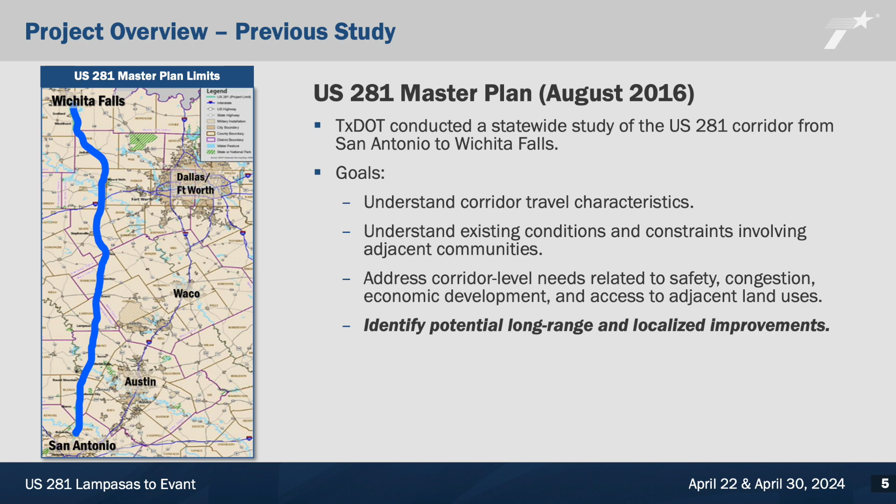For Lampasas County, the 2016 Master Plan findings included the following: improvements are needed in the next 5 to 10 years to address safety and mobility needs. Lowering the crash rate was needed on US 281, specifically from Lampasas to north of Adamsville. Additional capacity was needed to meet future traffic demands resulting from population growth and significant truck traffic.

The purpose of the proposed project is to enhance safety and improve mobility while addressing long-term needs of the corridor and the demands of a growing population. There is a need to address an aging transportation infrastructure in a state with a rapidly growing population. Originally constructed in the 1930s, improvements on US 281 are needed to continue supporting the growing population in the area and to improve passenger and freight mobility.

In addition, the project is needed to manage statewide transportation priorities. To meet the requirements of the Texas trunk system, US 281 is to be improved to enhance mobility, safety, and connectivity between cities with a population of over 20,000 people and major ports and ports of entry.

We have continued to research crash information since the last open house. US 281 from Lampasas to Evant had a rate of about 107 total crashes per 100 million vehicle miles from 2013 to 2022, which is about 1.5 times higher than the 2022 statewide average of 68 total crashes per 100 million vehicle miles for rural U.S. highways. Statewide data indicates crashes on undivided highways are 1.6 times more frequent and 1.5 times more likely to be fatal compared to divided highways with grassy medians as proposed in this project.

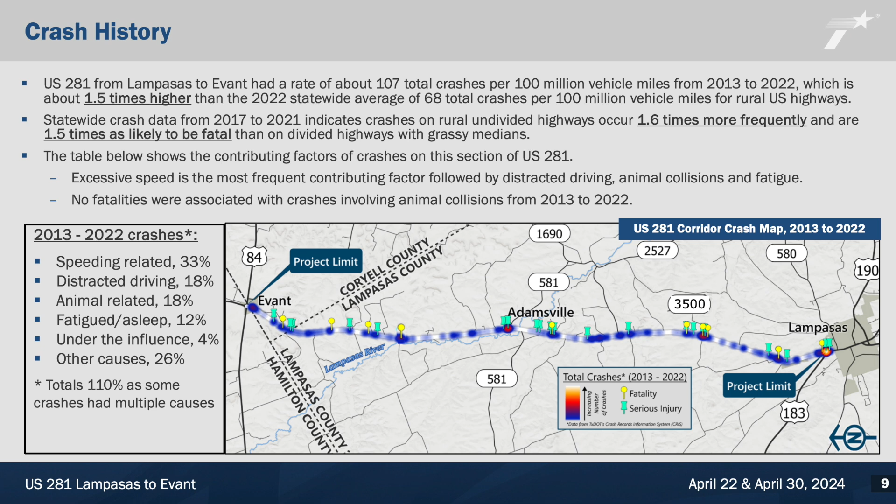The table shown here indicates a percentage breakdown of the various contributing factors for crashes on this section of US 281. Excessive speed is by far the most frequent contributing factor to crashes at 33%, with distracted driving, animal collisions, and fatigue as other factors. Also, no fatalities were associated with crashes involving animal collisions from 2013 to 2022.

TxDOT is focused on safety as a high priority in all the work it does. Divided roadways reduce crashes by 43% compared to undivided highways, regardless of what factors contributed to the crash.

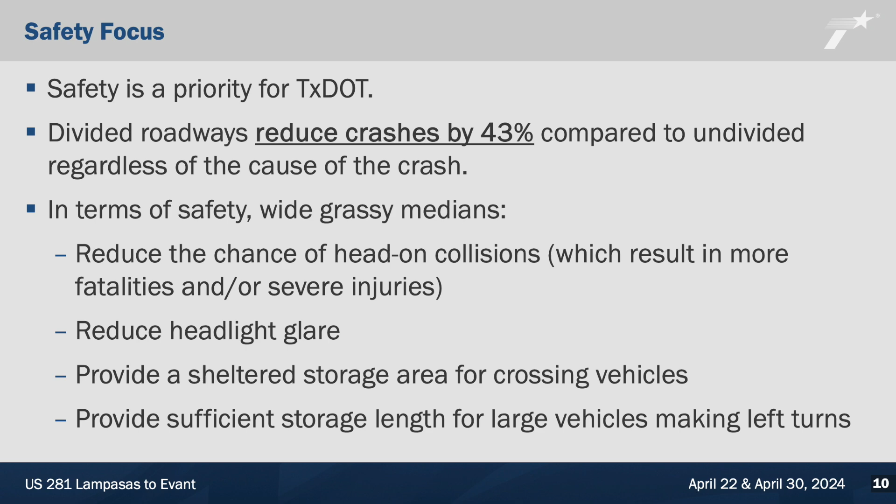In terms of safety, there are many benefits of wide medians. The main benefit is a reduction in head-on collisions, which most often result in fatalities or severe injuries. Other benefits include a reduction in headlight glare, a safety area for crossing vehicles, and added space for large vehicles making left turns.

Prior to December 16, 2014, the Federal Highway Administration, or FHWA, reviewed and approved documents prepared under the National Environmental Policy Act, known as NEPA. However, on December 16, 2014, the Texas Department of Transportation assumed responsibility from FHWA through a Memorandum of Understanding to review and approve certain assigned NEPA environmental documents.

This Memorandum of Understanding between TxDOT and FHWA was updated on December 9, 2019. The review and approval process applies to this project. Environmental studies are being conducted for the project to support an environmental clearance in accordance with NEPA. These environmental analyses are necessary to identify, avoid, and minimize effects to the human and natural environments.

Notices for this open house were advertised in the Lampasas Dispatch Record, the 4-County Evant Star, and on the TxDOT.gov website under Hearings and Meeting Schedule. The Brownwood District Public Information Officer also prepared a news media release to advertise the open house in the newspapers previously mentioned and in the Lampasas Radiogram. Additionally, notifications were mailed to local elected officials, adjacent property owners, and additional stakeholders or interested parties. A postcard was sent to zip codes within the proposed project area. Project information is also available on the TxDOT.gov website.

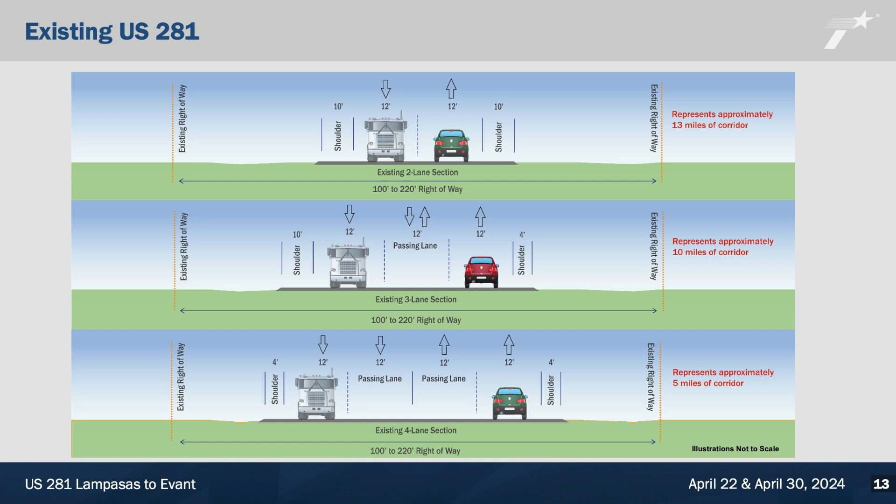About 13 miles of the corridor has one lane in each direction without passing lanes as seen in the first image. Another 10 miles of the corridor has a single passing lane in alternating directions as shown next. The remaining 5 miles of the corridor has passing lanes in both directions as seen at the bottom.

The proposed project would improve mobility by constructing additional travel lanes, transforming the highway to 2 lanes in each direction. The project would increase safety by bringing the roadway up to current design and safety standards, which will reduce the potential for head-on crashes and provide a refuge area for those wanting to turn left.

Separating northbound and southbound travel lanes with a grassy center median as shown in the typical section at the top of this slide. Note that proposed right-of-way is required on the west or east, or in some cases both sides of the existing roadway. There may also be cases where the proposed right-of-way width is wider to accommodate existing terrain.

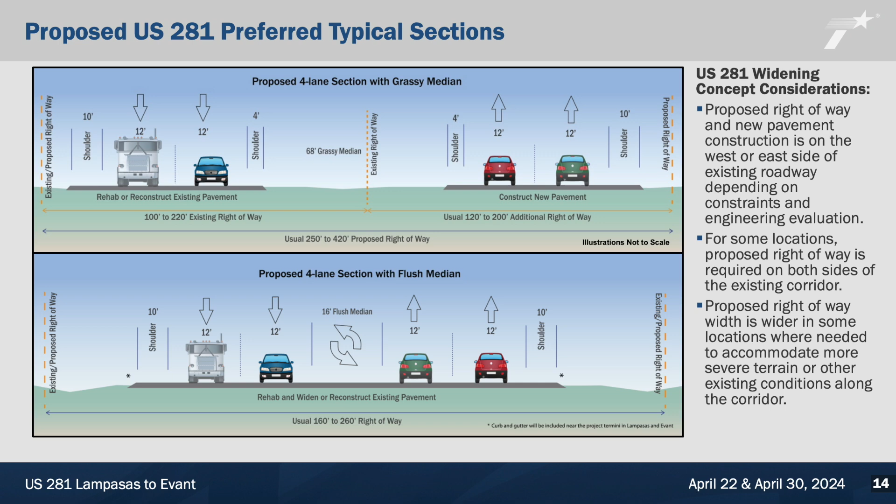In the developed areas around Lampasas and Evant, the highway widening consists of a flush paved median that would also serve as a continuous two-way left turn lane as shown by the figure at the bottom of this slide. The preferred route option includes upgrading other safety features such as guardrail, culvert end treatments, and wide safety shoulders.

In the most constrained area in the center of Adamsville, the preferred route option will require some additional right-of-way on the west side of US 281 to provide the desirable width for the center two-way left turn lane and wider shoulders, provide sufficient width for more gradual grading and better drainage accommodation through town, and provide a buffer between the sidewalk and travel lanes.

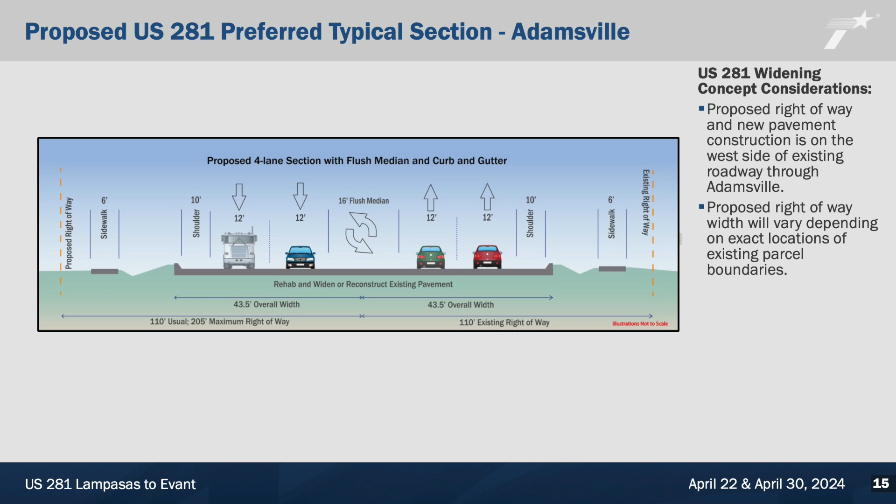The proposed design follows current TxDOT design standards for a 75 mile per hour rural highway. The grades of the original highway built in the 1930s and then widened in the 1960s were designed for 40 miles per hour. Many of the existing low points must be raised and high points lowered.

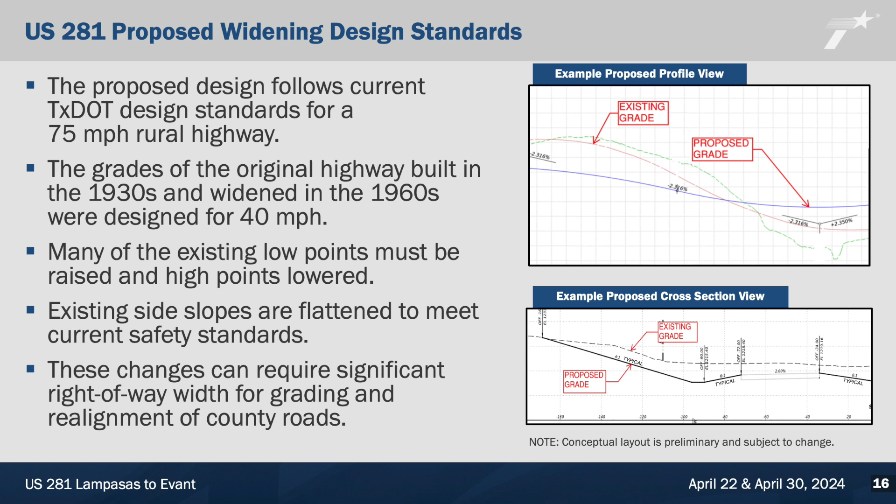You can see an example of the relative difference in grade between the existing and proposed ground in the top image. The existing side slopes must also be flattened to meet current safety standards, an example of which is depicted in the bottom image. These changes can require significant additional right-of-way width for grading as well as for the realignment of county roads.

More than 500 acres of right-of-way is required, impacting more than 160 parcels. Displacement of 9 residences, 3 businesses, and 12 other privately owned structures. Impact to 17 miles of overhead utilities and 1 electric transmission tower. Approximate construction cost of $249 million in current dollars. Please note the preferred route option final design is pending environmental study.

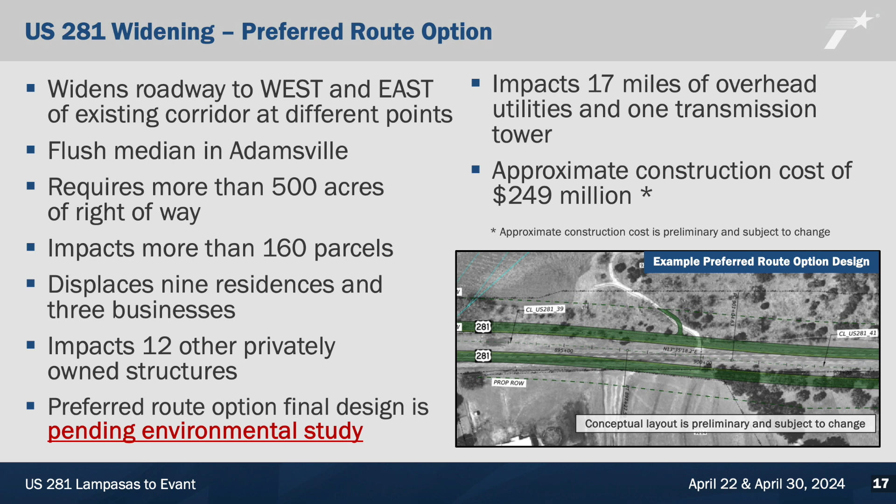To accommodate the desirable width for the center two-way left turn lane and shoulders, and to provide sufficient width for gradual grading and better drainage accommodation through town, plus providing a buffer between the proposed sidewalk and travel lanes, the design through Adamsville was refined. The revised design will require some additional right-of-way on the west side of US 281.

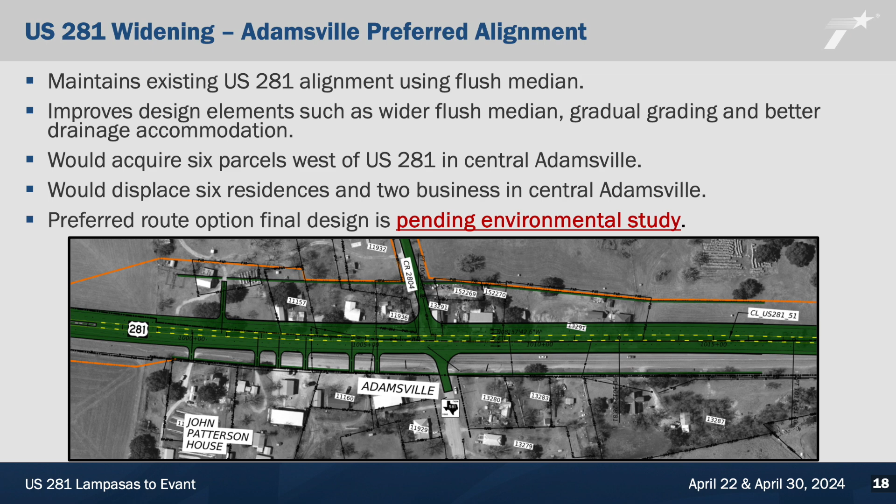The preferred route option will maintain the existing US 281 alignment through Adamsville using a flush median, improve design elements such as wider flush median and shoulders, gradual grading, and better drainage accommodation, requires acquisition of 6 parcels west of US 281 that would displace 6 residences and 2 businesses in central Adamsville. Please note the Adamsville Preferred Route Option final design is also pending environmental study.

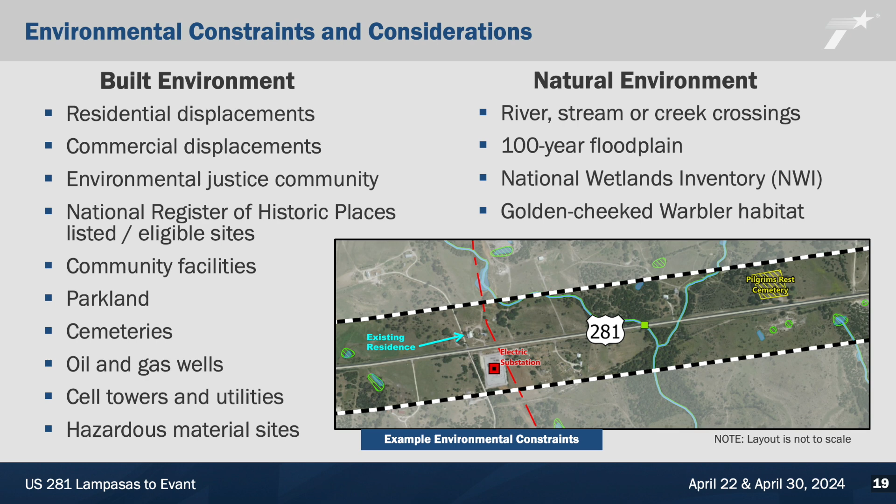The natural resources include rivers, streams, creeks, and wetlands, as well as habitat for endangered species such as the golden-cheeked warbler.

Other considerations include feedback from the Adamsville community from a stakeholders meeting that was held in January 2024, where we heard from more than 50 members of that community. Additional right-of-way required to meet current design and safety standards, parcels impacted, and parcels divided or bisected.

Following this open house and comment period, we will review public comments and incorporate them into the final preferred route option design to the extent feasible. At this point, we will move forward with preparation of the required NEPA documentation and development of final schematics design.

All public comments received during this open house will be fully considered and responded to in the US 281 open house record and made part of the final documentation for this US 281 Lampasas to Evant project. This documentation will then be made available for public review and download on the open house website.